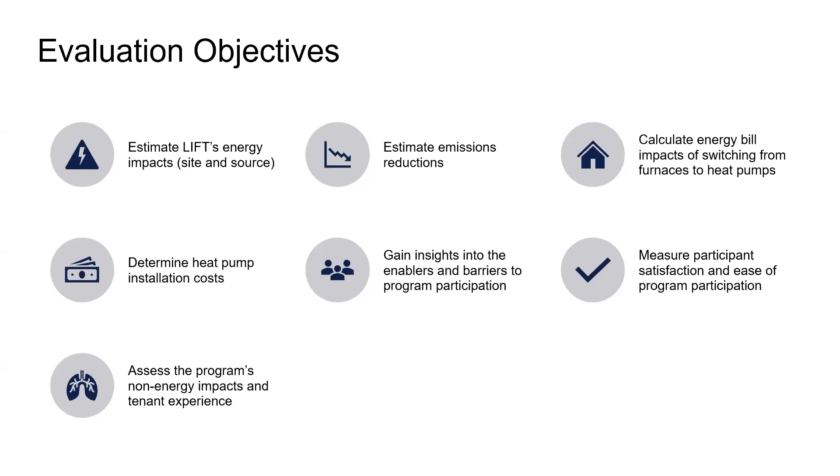Next slide, please. And we adopted this evaluation approach to address these research objectives, and we've organized these through the sort of program life cycle, right from program delivery to program performance to participant experience. So in order to understand how the program performed with respect to delivery, we conducted program staff interviews, we conducted program implementer interviews, that was with the AEA team, and then contractor interviews, those who participated and delivered, like the installation contractors, and also those who underwent training through MCE's program.

In order to assess program performance, we undertook on-site data collection, equipment data logging, and also conducted a billing analysis, utility meter data analysis. And to assess the participant experience, there were other firms that actually conducted the occupant surveys, but DNV analyzed the data from the pre-post occupant surveys, and also conducted interviews with property managers to understand what their experience on the program was like. Let's move on to the next slide.

So since this was a pilot, there were key performance metrics laid out by MCE to measure progress through this pilot period along each of these dimensions. And the specific metrics aimed at assessing whether the program was reaching the intended audience. How many households where the primary language spoken was not English were reached by the program. How many of these households could be characterized as extended family households, where it wasn't just a nuclear family, but perhaps you had multiple generations or two siblings, families living together. How many of these households were outside of CalEnviroScreen defined blighted areas or disadvantaged areas?

And the aim of this metric was to assess whether the program was serving the naturally occurring affordable housing customer segment. How many of these units were receiving comprehensive upgrades, the percent of households that were installing energy efficiency measures as well through the LIFT program, and then to understand the costs incurred to procure and install heat pumps. These were the delivery-focused measures. And then the performance-focused measures had to do with savings, bill impact, how these translate to GHG emissions, and then the BTU savings impact of heat pump installation.

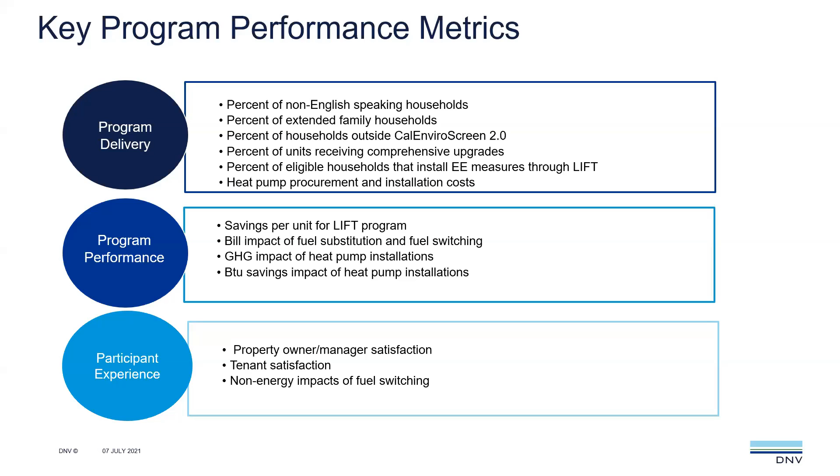And then finally, the participant experience. How was this for all of the folks who participated or were involved in delivering this program? The property owner or manager, the tenant, the non-energy impacts, and we also spoke to contractors, as we said. So let's get into the results for program delivery. If we could go to slide 14. The very first, so there's a lot of work on this, but the way we've laid it out is how we define this, what the source of this data.

Yeah, Gomati, sorry to interrupt. It's just the sound is still really muffled. I wonder if you bring your headset to the front, maybe. How about now? That's much better. Yes. Okay. I'm literally holding the. I don't know if I'm on camera. It looks a little bit ridiculous, but let's go with it. No, it's okay. And please, folks, let us know if that's better. Thank you. All right.

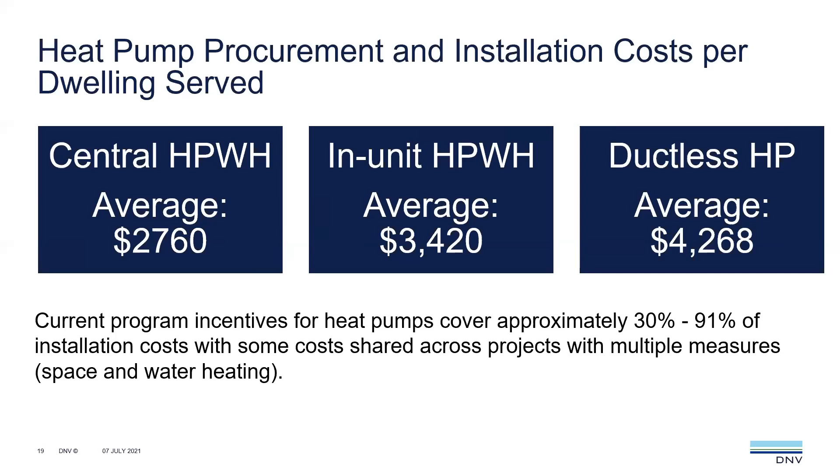Excellent. Okay, I'm going to start off here, kind of laying the foundation for the program's heat pump projects, and we'll talk about the population of projects that received heat pump benefits, and talk about the analysis scope in terms of the sample that we have. So the table on the slide provides some characteristics of the 12 projects that the program booked.

So left to right, we've got the rebate approval date, so it gives you a sense of the project timeline within the program. The program year is the PY header there. EM&V scope indicates whether the project was eligible, or it was eligible and analyzed, or if the timeline for the project did not allow it to be included. And then we have a sample ID as well as a project ID. The project ID was tracked by MCE. The sample ID is used by the M&V team.

So I'll point out if it has a letter and a number, like B1 and B2, those are adjacent. Those are basically the same property, but different projects. So in that case, it was like a phased project. So there's multiple, but they're really adjacent to one another and share similar building characteristics. And then the location, so this is the city within MCE's territory, the project scope.

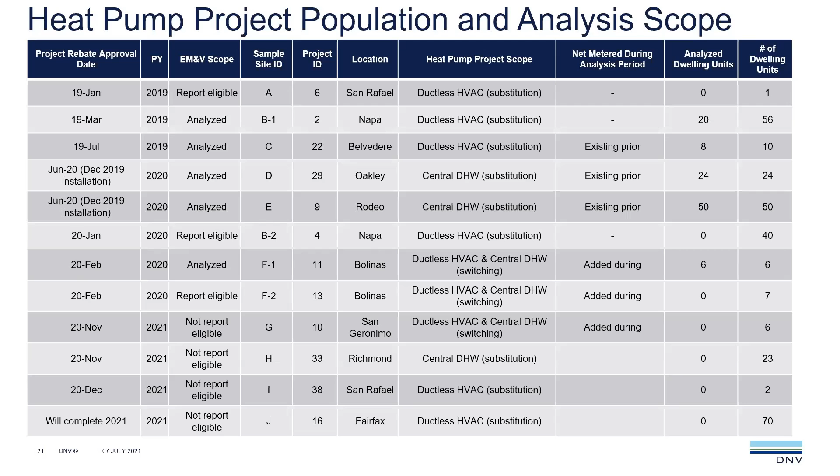Okay, I think we can move to the next slide, get into some results. So I'm going to present first the site energy savings per dwelling unit. So looking at the table, we've got the number of units. This is the dwelling units. And then we have electric kilowatt hour savings, demand savings estimates, and then gas energy savings. This is all per dwelling unit.

So the top row there, not including the header, this is the estimate from energy efficiency. So not the heat pump measures, but everything else: lighting, hot water reduction measures, insulation, those types of things that the program was offering. This comes straight from the program tracking data that we received. So 86 kilowatt hours per dwelling unit savings from the energy efficiency, 0.006 kilowatt per dwelling unit, and then 5 therms per dwelling unit.

Okay, so let's look at the next 2 rows. So heat pump substitution: 276 dwelling units benefited from heat pump substitution sponsored by the program. So we can see the negative 150 kilowatt hours. So annually, each dwelling unit on average experienced an increase of 150 kilowatt hours consumption, right? We're going from a natural gas fuel to an electric fuel, so we're adding electric loads. So we see an increase there. That's not unexpected in the fuel substitution measure.

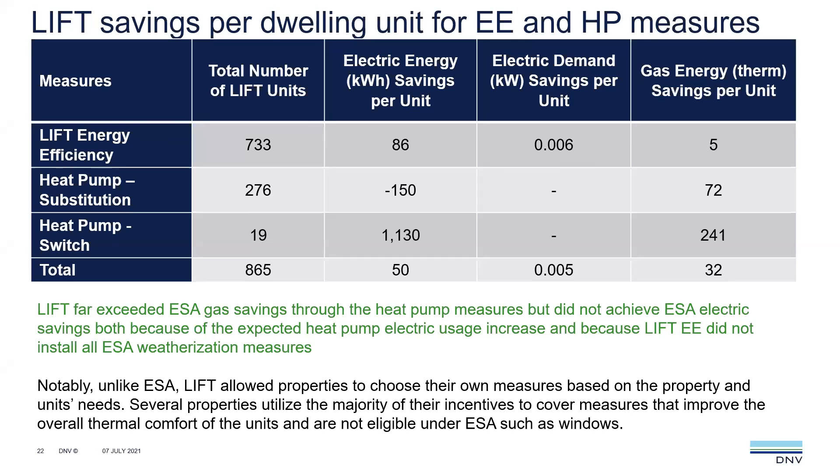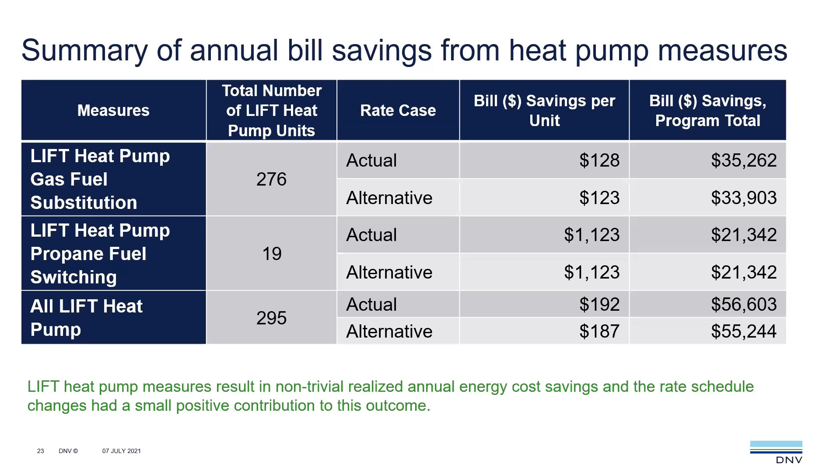So overall, the 295 units, the actual bill savings annual per dwelling unit, $192. If you're looking at the alternative rates, pretty similar at 187. Overall, 295 units. That means the program resulted in 56,000 and change total annual savings for the participants. Okay, I think we can press on.

So we're talking about emissions impacts on this slide. So we have, again, the fuel substitution and fuel switching lines here, present emissions savings per unit, and then times the total number of units to get the program impact. So I'll start with the fuel substitution, 0.91 tons of CO2 reduced per year. So this is both including the estimates of the on-site combustion reduction, and then any source emissions increase, say, from the added electric load.

So those are substantial, I think, at the dwelling unit level. And then you can see, based on the number of units that are treated, the program has significant annual emissions reductions impacts. Looking at the fuel switching, we see really high CO2. Again, that's probably impacted by the addition of PV, reducing that. Not as high a carbon monoxide.

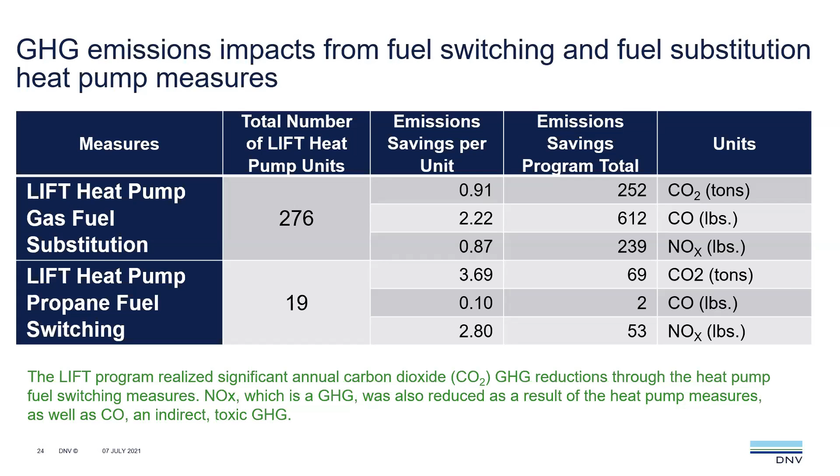Okay, so this slide is talking about source energy savings. So we covered the site energy savings, what you would see at your meter level. And this is talking about taking the energy source all the way back to, what does the power plant need to provide here? So per dwelling unit on the substitution, almost 7,400 kBtu annual energy savings at the dwelling unit, and the fuel switching, again, that includes the addition of PV. So it's quite inflated versus what we would expect to see with just, say, space or water heating fuel switching measure.

But overall, including both substitution and fuel switching, the source energy saved per dwelling unit over 9,000 kBtu. And as a program overall, 2.7 million kBtu saved at the source. So this is much higher than reported and evaluated PG&E ESA savings overall, or just specifically for multifamily, which is comparable for this program. So definitely exceeded the program's target here for source savings exceeding ESA.

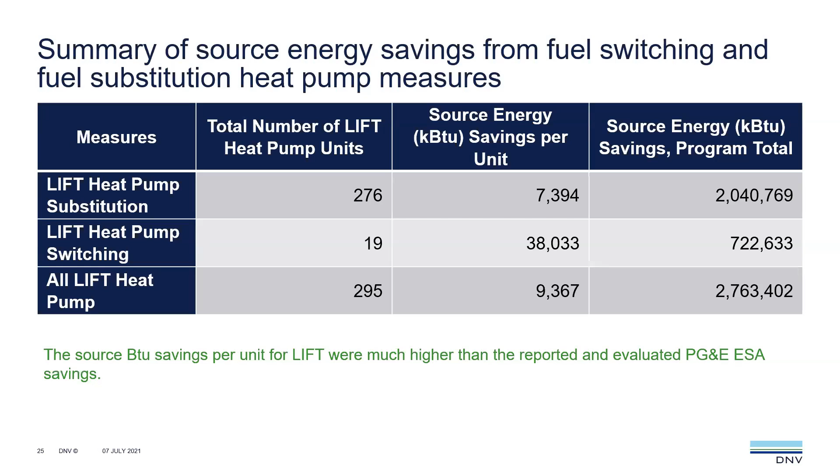So what we're looking at today is a set of interviews that we did with property managers. We did some follow-up phone calls, in-depth interviews to measure their satisfaction with program interaction. We asked them a host of questions and looked at standard performance metrics like satisfaction with the income verification requirements, paperwork and documentation necessary to meet the requirements, any technical assistance that they had received from AEA, the program contractor, rebates, measure offerings, program overall. The program aimed to achieve a satisfaction rating of 80% or better. And so what's presented here on the slide is a 5-point scale looking at their satisfaction where they rated a 4 or 5 on the 5-point scale.

So overall, we found the program achieved their goal for 3 of the 6 program elements. The interviews are really representative of all the measures that they installed. So they did heat pump water heaters, heat pump space heaters, as well as the set of building measures, things like lighting, insulation, windows. And so where we saw responses of less than satisfied, often related to the other measures and sort of the burden of going into customers' homes, the frequency in which they had to do that. And then in general, the labor involved in getting the individual paperwork documentation requirements for the individual tenants was rated to be the least satisfied. So some opportunity to streamline that.

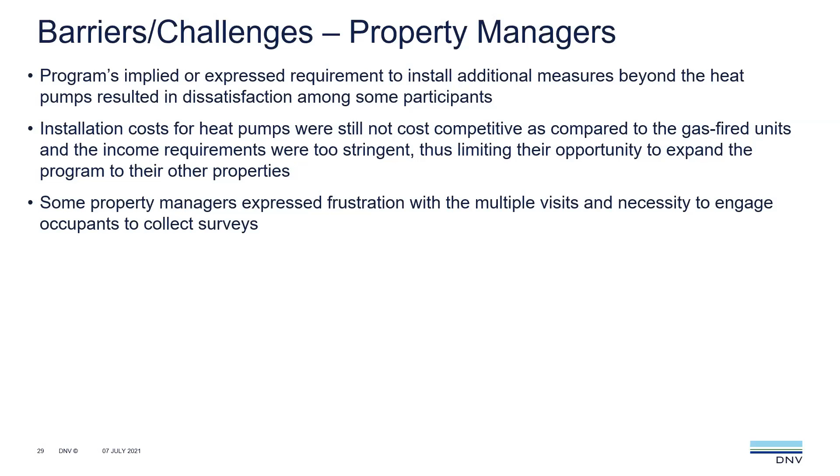And of course, the final component here is that these heat pumps are difficult to get installed. So we can jump ahead to the next slide.

We have a set of motivators. These are the win themes in terms of why property managers went ahead with measures that they had never heard of or dealt with before, those being that there was quite a bit of education and responsiveness provided by the installation contractor AEA. The incentives were substantial, providing up to 80% of the project cost for most property managers. They found their equipment was effectively at the end of its useful life.

Some had intentions to go with solar and recognized that they would have low or no operating costs for those specific measures. And many of them had long-term corporate sustainability goals, a desire to do the right thing. And then, of course, the benefit it gives to tenants as it relates to comfort and safety, and possibly the ability to increase their costs of renting out to tenants because they're giving them a lower cost of operation. So we can move ahead to the next slide.

So in addition to speaking with property managers, we also conducted interviews with tenants. DNV prepared the tenant instrument, and then MCE coordinated with their contractors to collect those surveys. We conducted a comprehensive guide to try and capture the pre and post experience with tenants. And what we looked at was an 80% satisfaction goal for ease of participation.

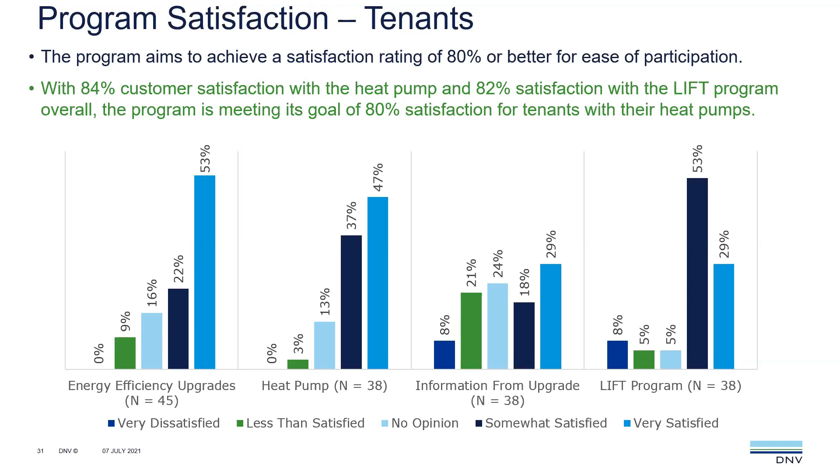Overall, what we're seeing in this graph is a 5 point scale. So the two bars on the right for each graph are the 4 and the 5 points. Collectively, we see for energy efficiency upgrades a satisfaction rating of 75, so near the goal. For the heat pump measure, the program exceeded its goal at 84%. Information about the upgrade was lower at 47%, and the LIFT program overall was rated at 82%. And we can go ahead to the next slide.

So here we show the non-energy impacts from the pre-post survey. What we wanted to identify was, is the quality of life better for these tenants? The metrics we looked at were their satisfaction in hot weather, in cold weather, whether air quality had improved, and the noise of the system. So we see the tenants are more satisfied in the hot weather, and this may be due to the added benefit of air conditioning with the mini split systems.

As you can see, the blue bar indicates their conditions in the pre-setting, and the green bar is the condition after the measure has been installed. And so what you recognize in this table is that when the weather is hot, we've exceeded in getting it just right for tenants, and they're quite satisfied with that added benefit of air conditioning. In cases where it was too hot or occasionally too hot in the precondition, that fell significantly from 43 to 10% and 32 to 13%.

Moving to the top right graph here, we have air temperature in cold weather. So the program had not achieved as high a satisfaction as it relates to cold weather. We still see tenants are occasionally or often too cold.

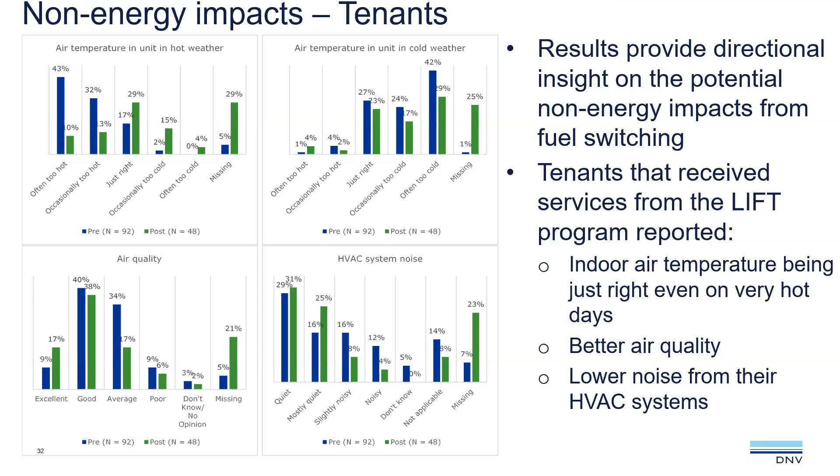So these are really just overall indicators that the fuel switching measures, heat pump water heaters and space heaters, are providing tenants improved comfort, safety, and improved quality of life. And we can go ahead down to the next slide.

So our surveys also included interviews with contractors that were installing the heat pump measures. At the onset of the program, there was a training that was done up in Santa Rosa to help educate contractors. We intercepted some of those contractors that participated in that at the first phase of our evaluation. The latter phase of our evaluation was contractors that were just involved in the installation and did not receive that additional training. We'll go ahead to the next slide.

So these following two slides that we're going to show are what are the perceived barriers to installing heat pumps and what are the enablers? There's quite a few barriers that are still problematic and creating challenges for contractors. And you'll see in comparison to the next slide, there's fewer enablers. So there's things that the programs are going to need to work on to get contractors ready to install these measures, providing workforce training to address education, installation. Those are still a strong need in the market. Education as it relates to maintenance and helping customers with operation, and then incentives in general.

This program is very generous with the incentives, but there is still quite a high cost for standard market rate installations. And so when we look at the first column there, financial barriers, contractors are calling out that the equipment costs are still quite high. There is insufficient incentives overall to attract customers. The paybacks, they're not receiving enough education to know that there is an energy savings associated with this. And so these are some of the financial barriers that were expressed.

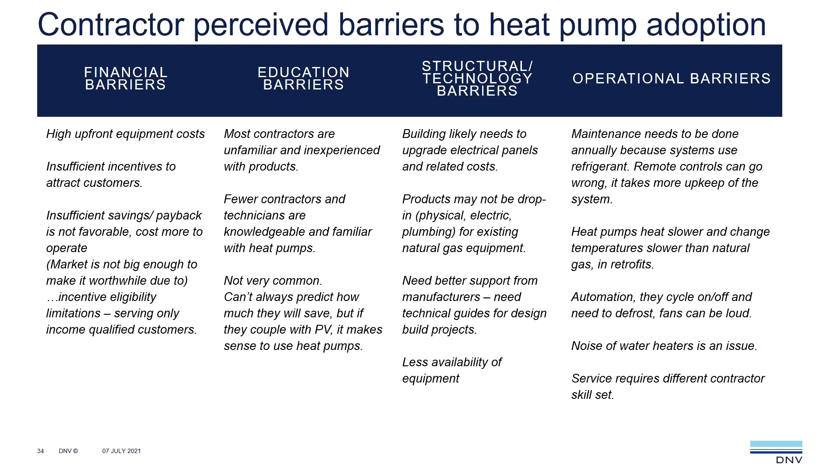So we will go ahead to our last slide regarding the overall satisfaction with contractors and experience. As I mentioned previously, we looked at what were some of the barriers and what are some of the enablers to heat pump adoption. You'll see that this list is quite a bit less, so really the bigger picture is we still see a lot of barriers for contractors. Some of the enablers or benefits are that people do recognize that we have a carbon problem, and companies are pursuing to be green and lowering their carbon footprints. So it's helping them achieve their sustainability goals.

They recognize the benefits to tenants as it relates to improved quality of life, comfort, air quality, as well as safety. Some enablers are when coupled with a PV system; we do see some cases where they are aware that there is a lower bill savings, but not all contractors are aware of that. And again, in major renovation or new construction, removing gas altogether from the infrastructure is a possible savings for these developers. And lastly, in cases where there are incentives like the ones that MCE and other utilities have been providing. So these are just a few of the enablers and some of the challenges that contractors went through.

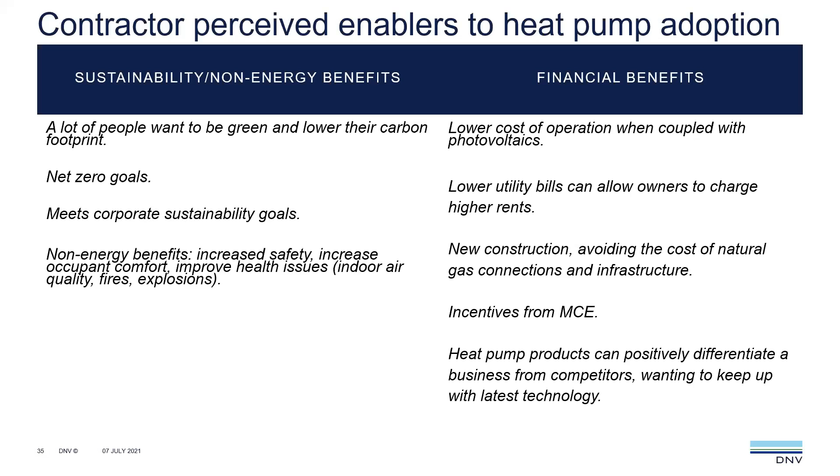And I will turn this over to, let's see here. We have a set of conclusions and recommendations next. Do we have any questions in our chat? I can continue. I see quite a few. Do we want to take those now? Perhaps, Grace, how are we doing on time? We scheduled until 12:30? Yes, we did. I think I still would like for us to keep moving forward and do questions at the end, but if we could speed up a little bit so we can get to the questions. So hopefully we can finish a little bit earlier, but just in case we have until 12:30. That sounds good. We have just 2 more slides, so if we could move on to the next slide. And one more, please.

Right, so the conclusions and recommendations for the program. This was a pilot, and the evaluation was being conducted as the program was getting off the ground. It's being developed and implemented simultaneously. So that's the context for this first recommendation: that the program should improve record-keeping requirements related to program tracking. Through the course of this evaluation, the evaluation team, DNV, identified some inconsistencies in the program tracking data, and that caused the implementer to rectify and reissue. Accessing the consumption data required a few iterations, and we had partial resolution on those. We identified some gaps in the occupant survey data, which had to be appended on discovery.

And as I noted earlier, this is sort of an industry characteristic. Contractor invoices do not include the detail. And so to the extent possible, requiring or prescribing a form where elements are broken down clearly would improve the usability of the data therein. Hidden or soft costs such as panel upgrades, if possible, should be a requirement to be broken down. One more recommendation was to maintain a comprehensive central database that includes granular data associated with each project site, unique identifiers, building classification, and so on. It just makes it more evaluable. Incentives provided, contractor information, labor costs, survey responses, so that there's a master comprehensive program tracking database. So that's the first recommendation.